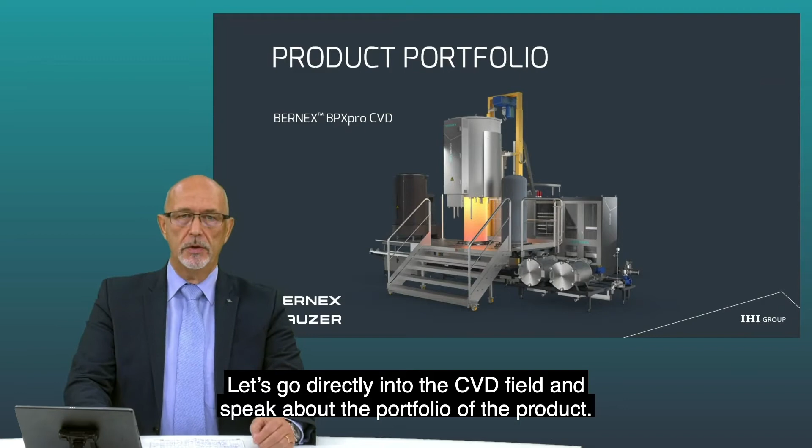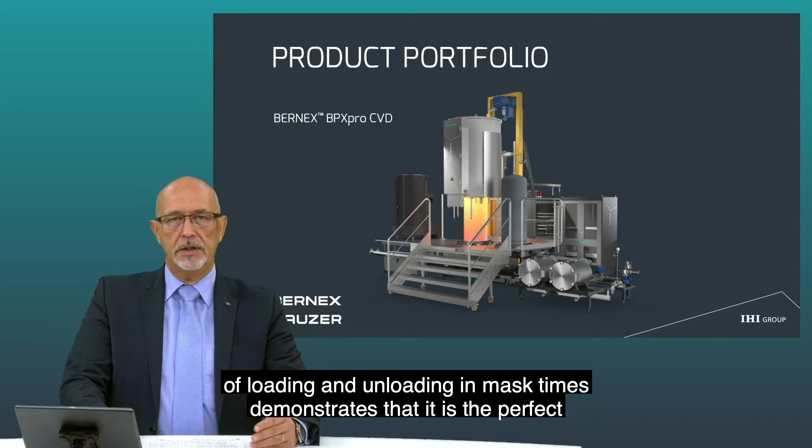So let's go directly into the CVD field, speaking about the portfolio of products. Of course, we have made CVD machines since 1973, fully dedicated in construction and design to cutting tools. The size of the reactors, the work trays, all the construction is really dedicated to cutting inserts. The fact that we have a dual chamber allows for preparation, loading, and unloading in mask times, demonstrating that it is the perfect tool dedicated for these applications.

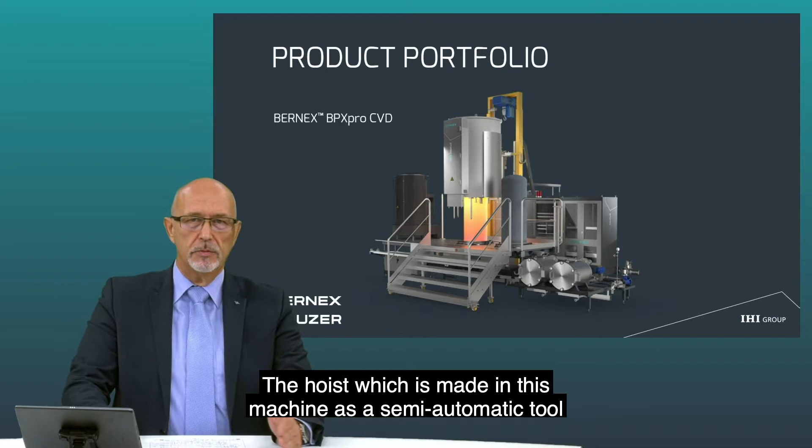The hoist makes this machine a semi-automatic tool, delivered with neutralization, which gives the machine the possibility to be totally free of environmental concerns. The important point is that we dedicate these machines to a multiple variety of coatings: TIN, TIC, TICN, MT-TICN, which by the way is a technology developed in the 80s and 90s by Bernex, as well as aluminum oxide with different crystallographic structures - alpha, kappa, and texture today.

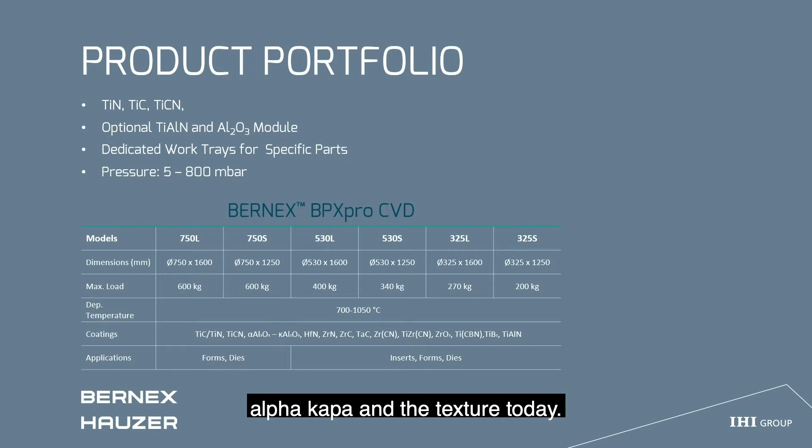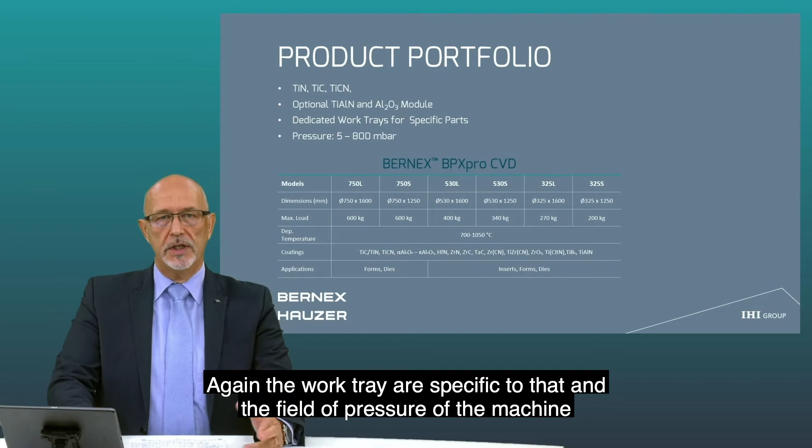And one of the latest is TiAlN coatings by CVD. Again, the work trays are specific to that, and the field of pressure of the machine moves from 5 to 800 millibars.

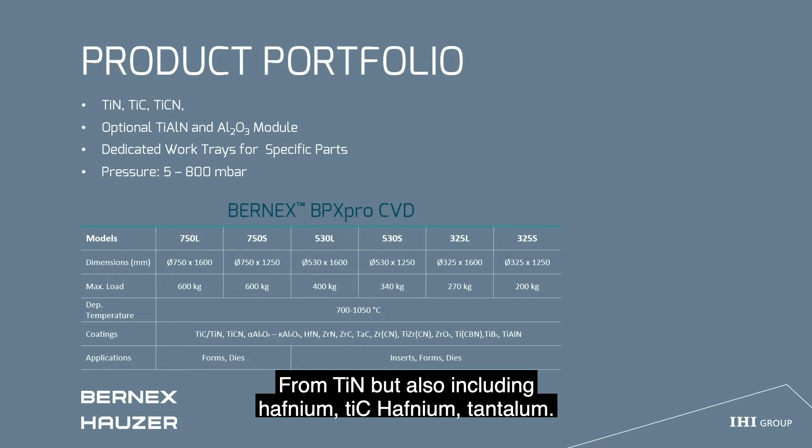This machine effectively allows us to have a nice spectrum of coatings, from TIN but also including hafnium, zirconium, tantalum, versatile elements in the modules of the machine, with hardware and software integration.

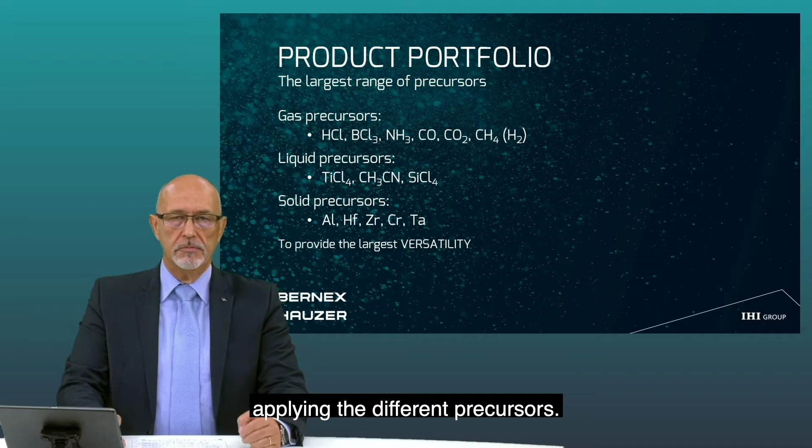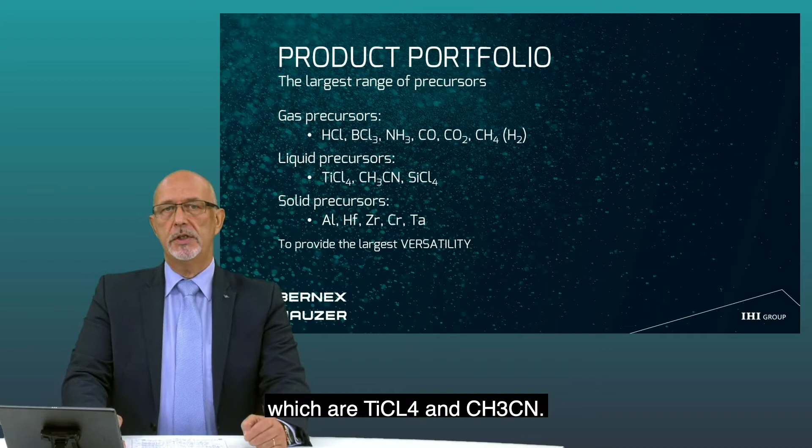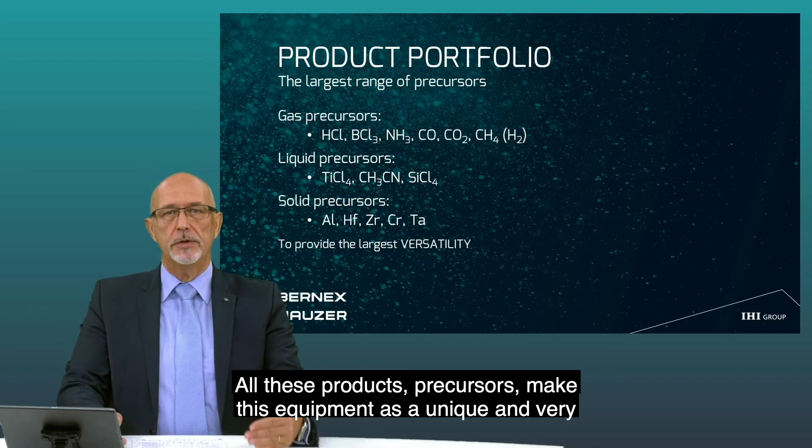To integrate these modules, we are applying different precursors: gases like HCl, BCl3, ammonia, CO, CO2, CH4, mixed with liquid precursors which are TiCl4 and CH3CN for the MT-CVD for instance, as well as SiCl4 to bring the additive silicon element into multilayer coatings. Of course, also solid precursors with aluminum, hafnium, zirconium, chromium, tantalum. So all these precursors make this equipment a unique and very versatile tool to apply different solutions for our customers.

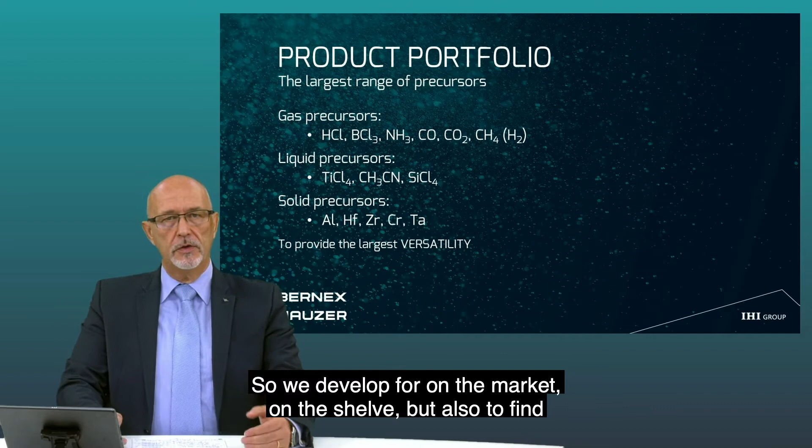We developed solutions on the shelf for the market, but also to find solutions to bring coating facility to our customers. We are really, as I would say - taking a word from Louis - enablers, making this portfolio of applications dedicated to our customers. So I will give you three examples of applications, and the first one here is an application for customers.

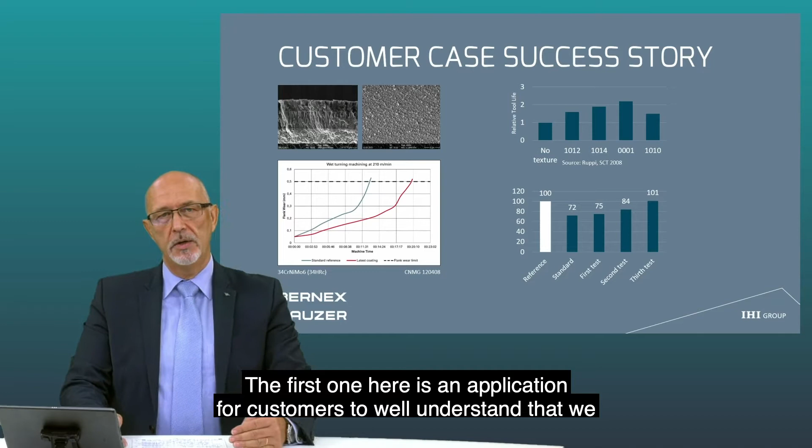So to understand that well, we build machines with upgrades, but we also support our customers over time, live, and in the development of applications. We had a customer who came back to us, having bought equipment from us a couple of years ago.

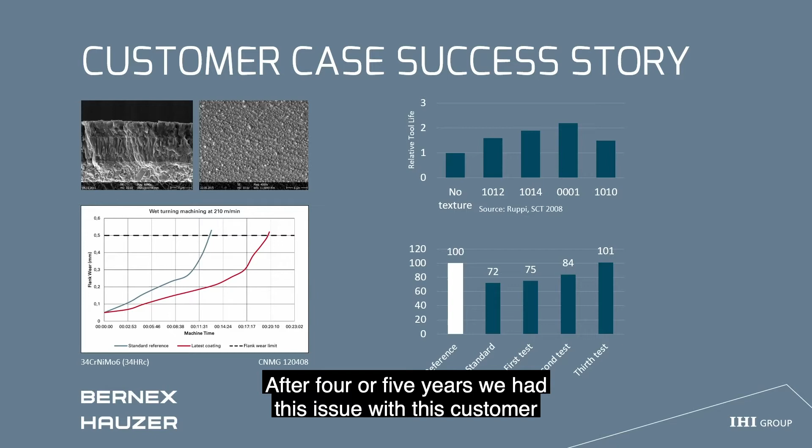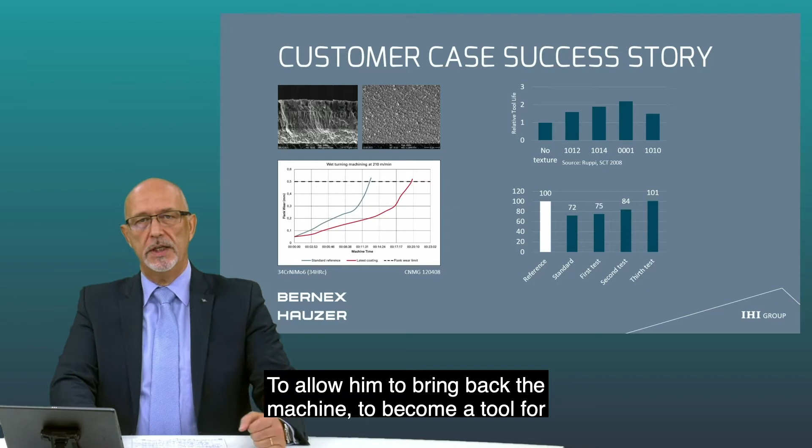We were dedicating some standard coatings, CVD coatings. After 4 or 5 years, we had an issue with this customer being far from the benchmarks. To allow him to bring the machine back to being a tool he could use for his actual needs, we participated with him in development campaigns with different test campaigns to increase the performance of the coating.

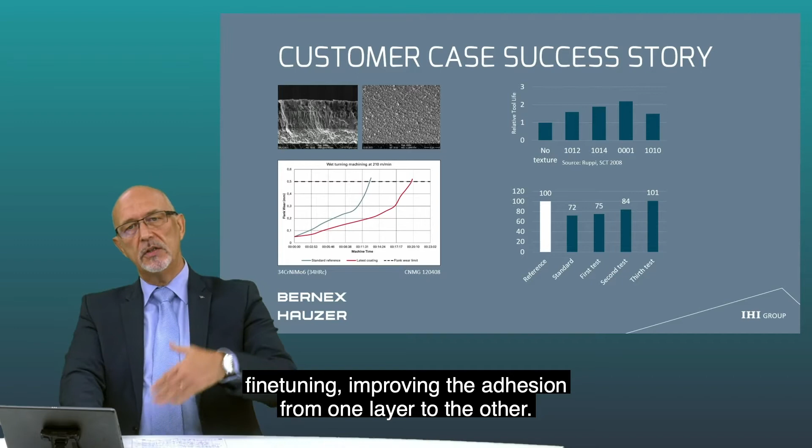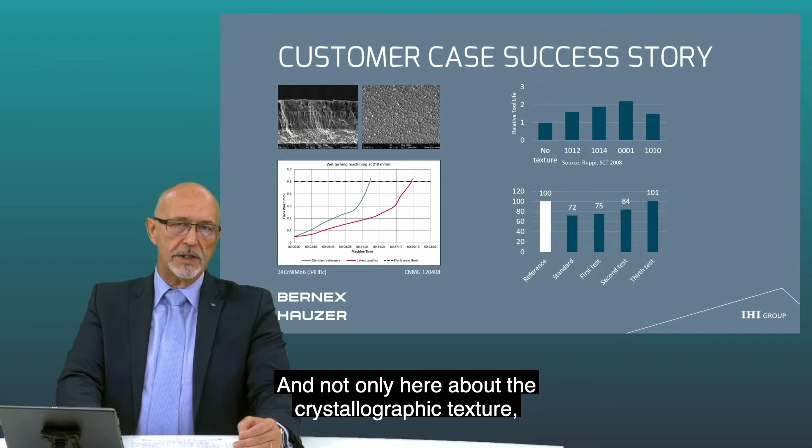So we did it by making new different multi-coating layers, improving the fine-tuning, improving the adhesion from one layer to the others, going from TiN, MTTiCN, aluminum oxide, and not only about the crystallographic texture but also the texture itself.

And so we managed to bring performance back from 70-75% to 84% of the actual benchmarks.

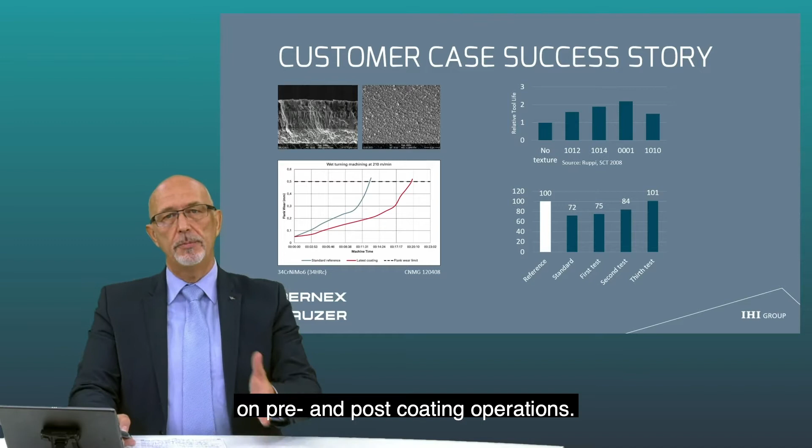The last improvement we also made thanks to working on what we call the pre and post coating operations, which helps to definitely bring the application back to the level of the benchmark.

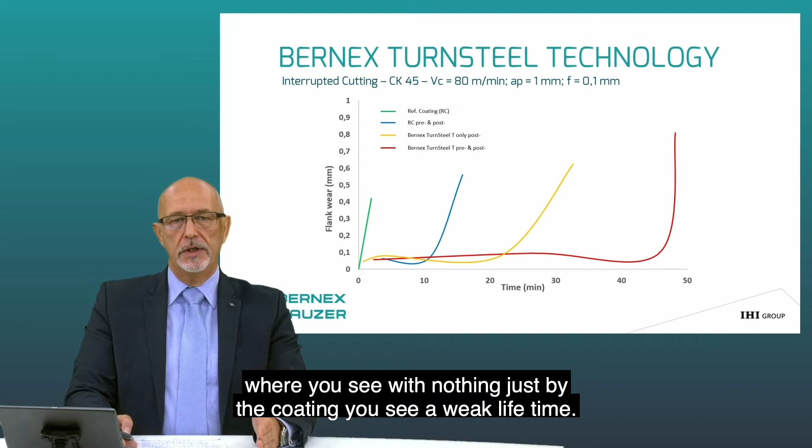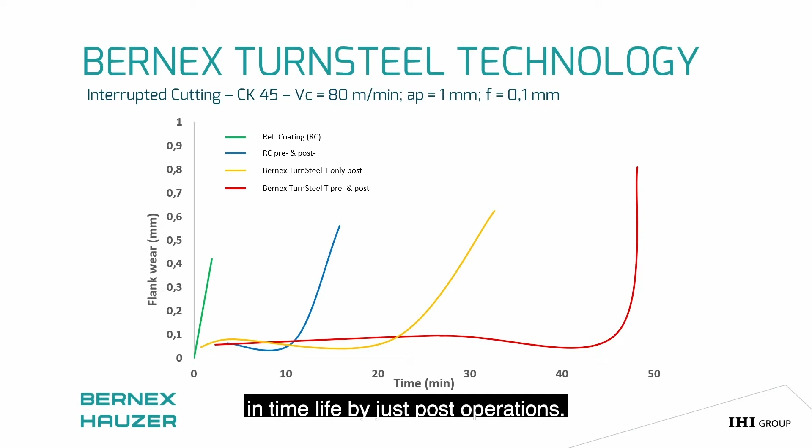To illustrate this pre and post coating effect, this graph explains it well. With standard coatings, with nothing, just the coating, you have a weak tool life, which you can increase by 10 minutes in tool life just with post operations.

By choosing the right dedicated coating, multi-layer aluminum oxide and texture, you can then jump to this stage, which is 30 minutes, a huge improvement in tool life.

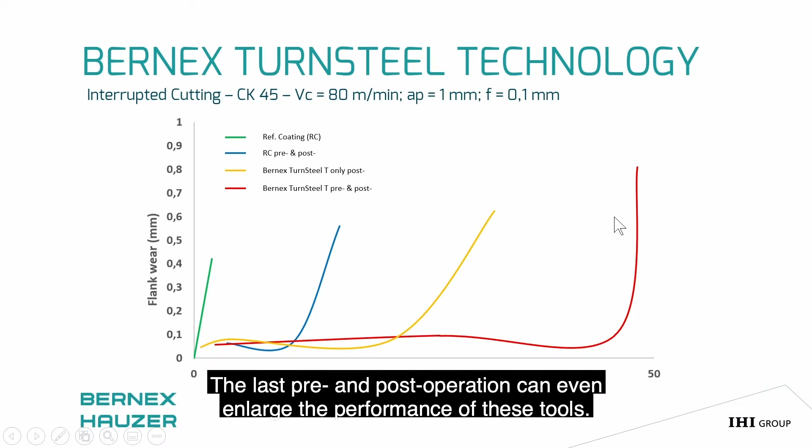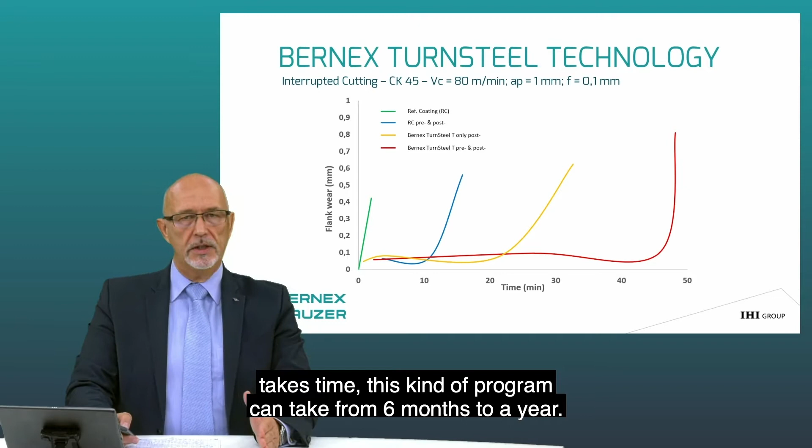And the pre and post operations can enlarge the performance of these tools even more. This is done in combination with our customers. These are things that take time - this kind of program can take from 6 months to a year.

It also allows us to upgrade our equipment, which we are fully able to do. One good illustration of this is the latest TiAlN coatings.

This was worked out by a German institute with OEMs, and they came back to us saying, okay, we found something nice, but this something nice with the TiAlN coatings needs to work with some new materials, new precursors, and working with a pressure field which is not usual.

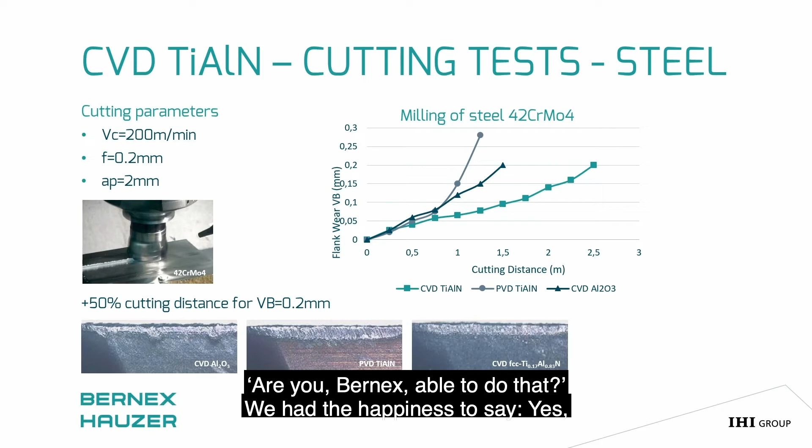Are you, Bernex, able to do that? So we had the happiness to say, yes, we know this precursor, we know how to handle these pressures, and that allowed us to propose an upgradable hardware with software technology to those customers developing these technologies.

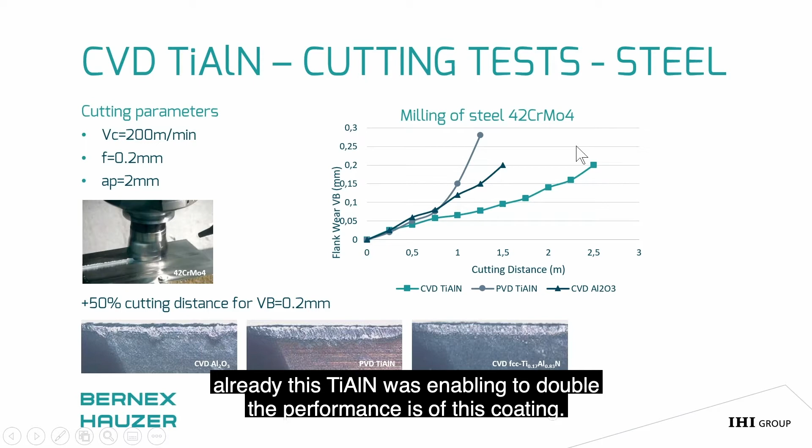Here is an illustration of one of these early coatings we did for one of our customers, where each uses his best PVD and CVD reference, and you see that this TiAlN already enabled doubling the performance of the coating. So this is really the aim of our organization.

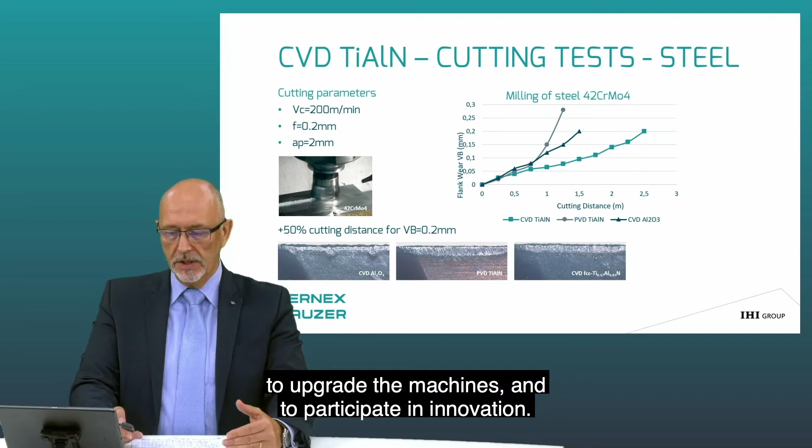It's to continue working on the development of tools, to upgrade machines, and to participate in innovations. So now, what's coming next? Because it's always a step to think about.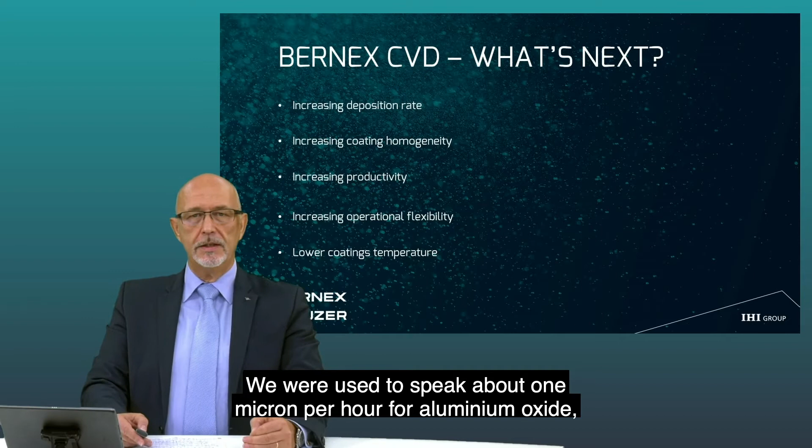Increasing the deposition rate - that's what we learned with this TiAlN. We learned that with different precursors, we are able to increase the deposition rate. We used to speak about 1 micron per hour for aluminum oxide, and with this TiAlN, we get to 2, 3, sometimes 4 microns per hour.

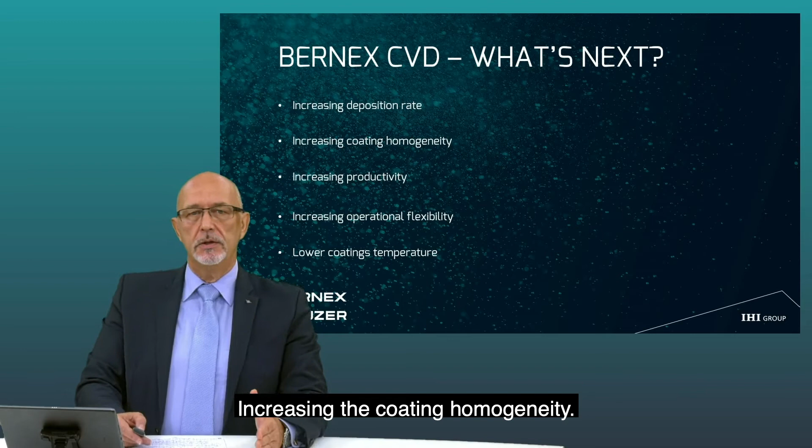Increasing the coating homogeneity - 20 years ago, when I joined this company, we were speaking about homogeneity or distribution of plus minus 20%. 10 years ago, with changes to our hardware and software, we were able to go down to plus minus 10%. And today we still think there is room to improve that further.

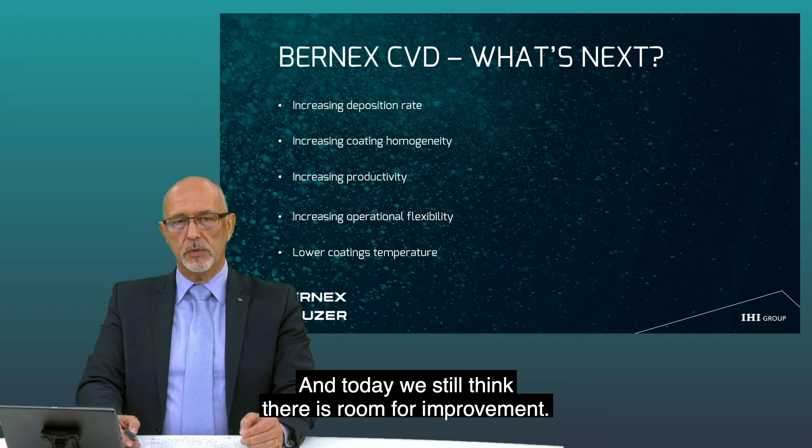So these two elements participate in improving and increasing productivity, but not only. There is some hardware development we are hard at work on, which can also participate in developing that, such as increasing operational flexibility through automation of the layout and the design, which also contributes to the evolution of our equipment.

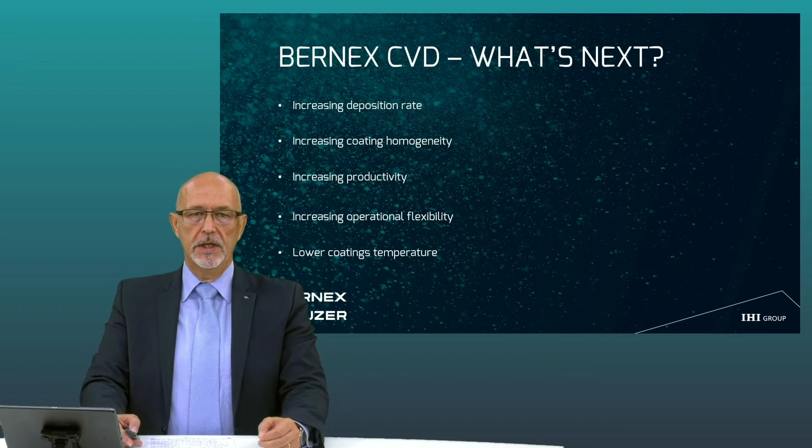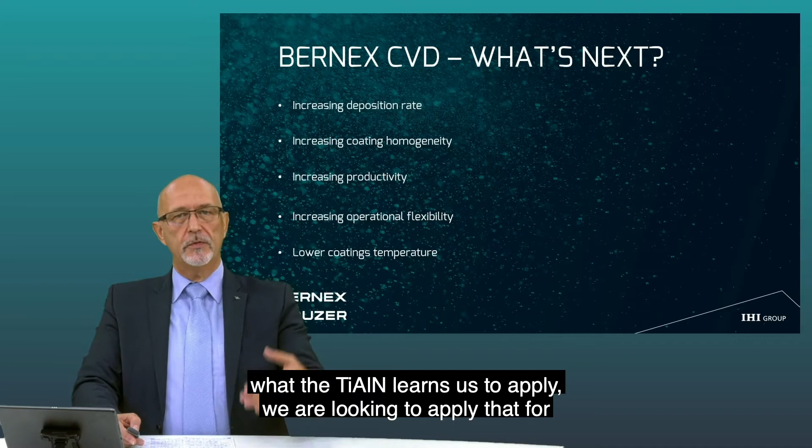And just to close the loop, lowering the coating temperature, because that's what the TiAlN teaches us to apply. We are looking to apply that for all the standard coatings.

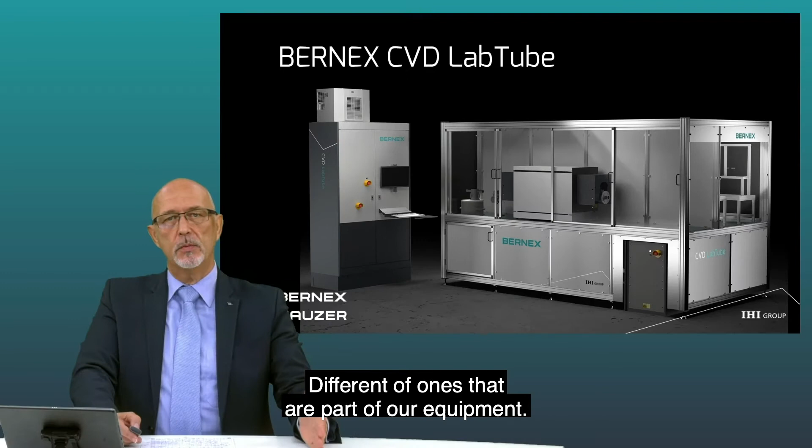One of the last things I wanted to present is here - another machine, our LabTube, which is totally an R&D machine dedicated to allowing the R&D department of all our customers to work with a broader portfolio of applications, natures, and substrates, different from what exists on our equipment. And I think that's what I wanted to briefly introduce you to this morning.

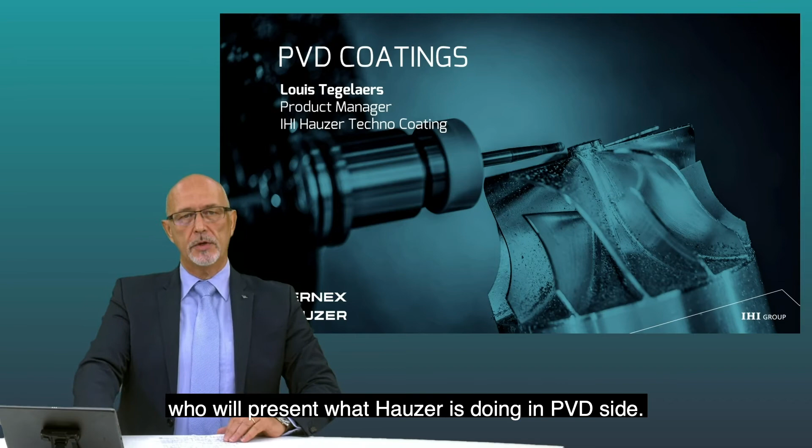I'm a product manager for a couple of years now at Hauzer Techno Coating, and I will tell something about PVD technology, where PVD stands for physical vapor deposition. Philippe talked earlier about CVD, which stands for chemical vapor deposition.

So I want to re-summarize a little bit what I'm going to speak about. We have some PVD solutions, some coating technologies. I want to discuss some results and test cases with customers, and I want to show you the product portfolio we have.

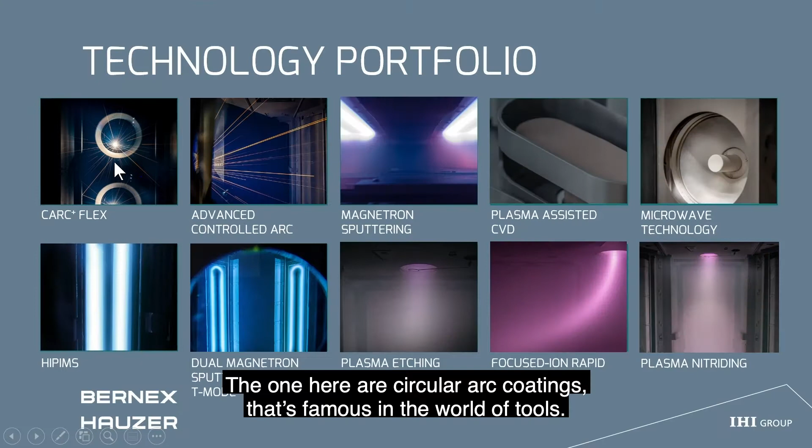One is circular arc coatings, which is famous in the world of tools. We developed our own circular arc called Flex, so we have higher output and higher currents on the surface, and therefore by splitting the beams we can still have a smooth surface.

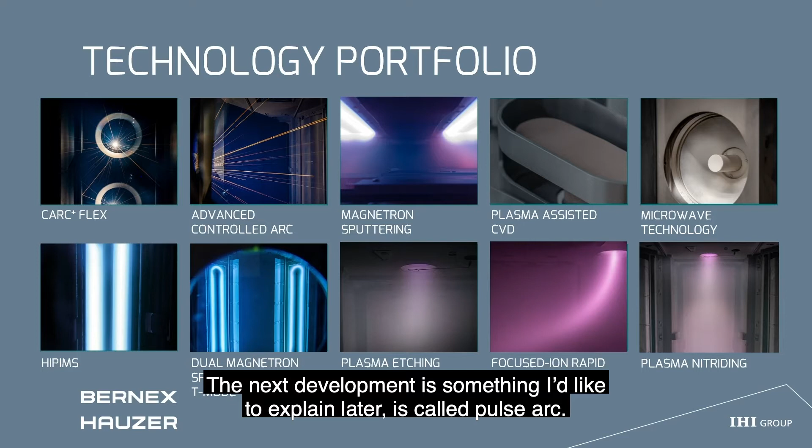The next development, which I'll explain later on as well, is called pulsed arc, and this pulsing decreases the roughness even more.

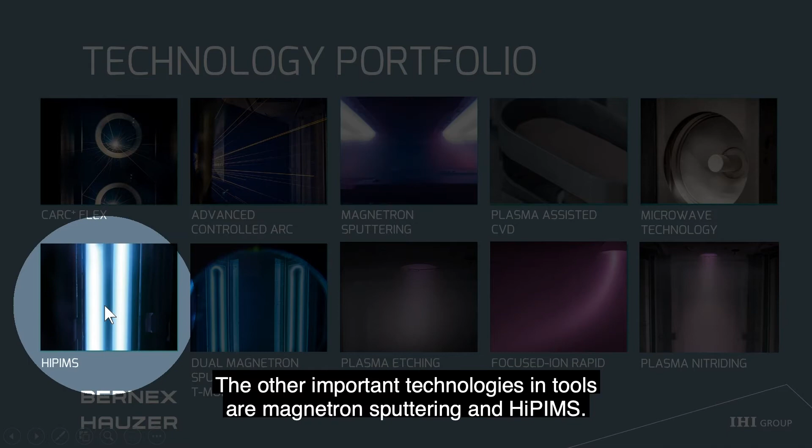The other important things in tools are magnetron sputtering and, for instance, HiPIMS. HiPIMS is also a magnetron sputter technology, but it's a new generation. Together with dual magnetron sputtering, this can combine nitride coatings and oxide coatings. That's for the cutting tools.

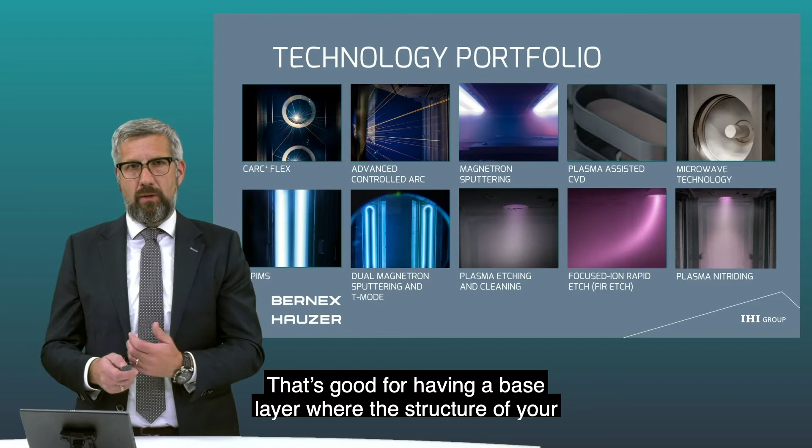For forming tools, we still have plasma nitriding, which you see here on the right hand. That's good for having a base layer where the structure of your coating is much better.

Furthermore, some other cleaning technologies are also important. If the product is not really clean, then the coating doesn't stick, and at the end of the day you will have a malfunctioning of your coating.

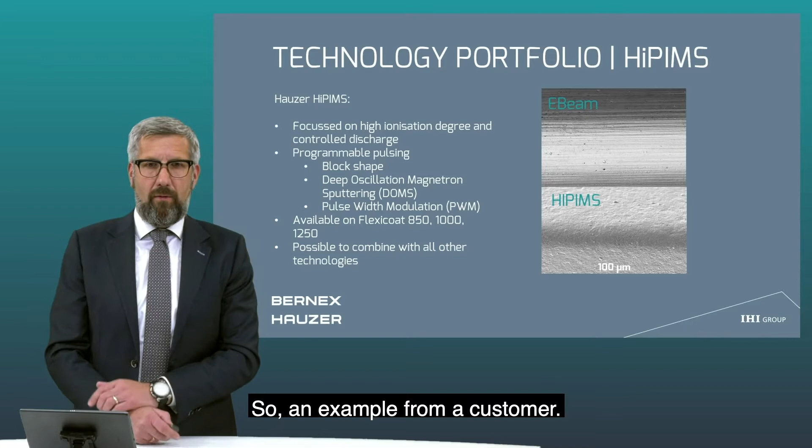So for an example from a customer: for the time being, E-beam technology was widely used for the tapping industry and is still used, very much used. It's a very good coating and mainly produces titanium nitride and titanium carbonitride.

In the next slide, I will show you that HiPIMS coatings can have some other benefits over these E-beam coatings. What is HiPIMS? HiPIMS stands for high power impulse magnetron sputtering.

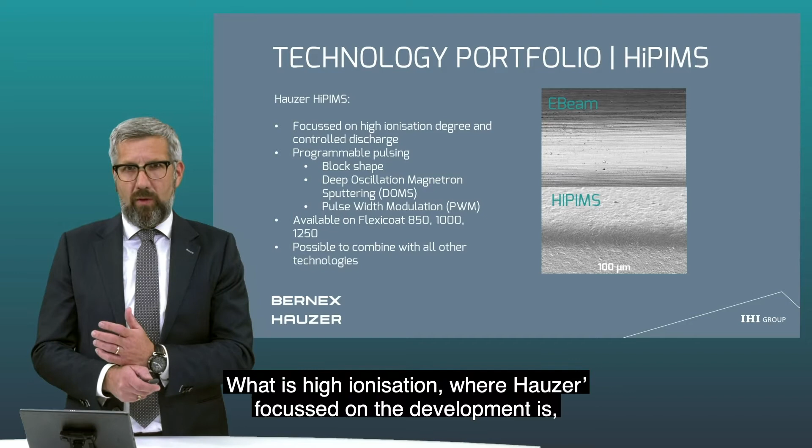What is high ionization? Where Hauzer focused development is we want to have a high ionization degree and a controlled discharge, meaning that the sputter rate still keeps high.

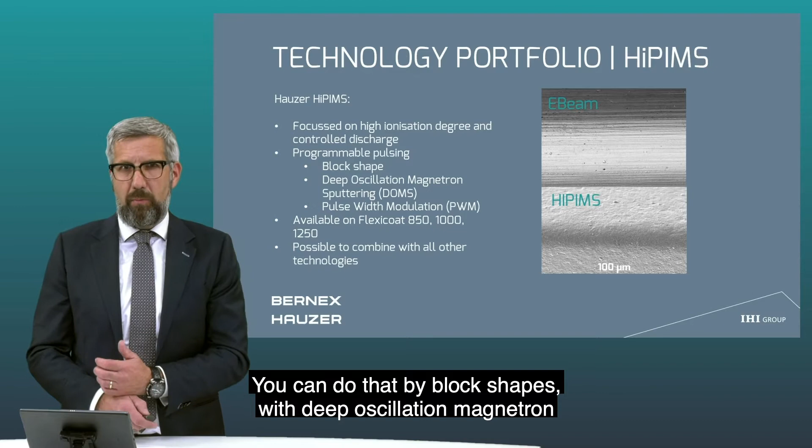You do this by programmable pulsing, and that you can do with block shapes, with deep oscillation magnetron sputtering, called DOMS as well, but also with pulse width modulation. Pulse width modulation needs a little bit more explanation.

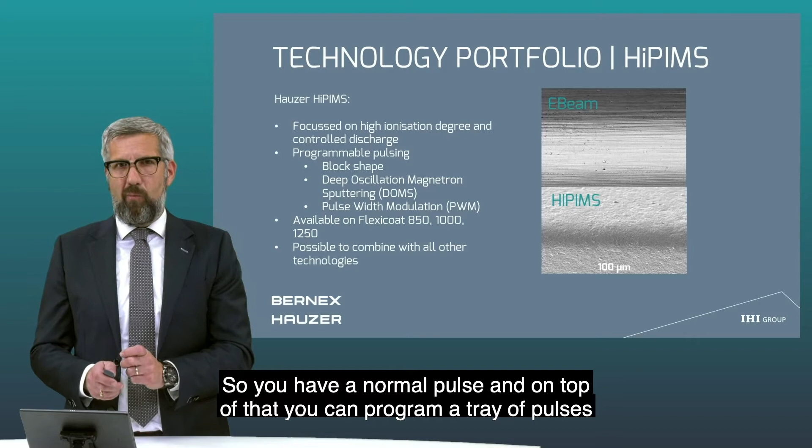So you have your normal pulse, and on top of that you can program a train of pulses, and by doing that you can adjust all the parameters of a coating. You can influence the internal tension, you can influence the build-up of the coating itself, and therefore have some new, renewable, programmable things put into a coating.

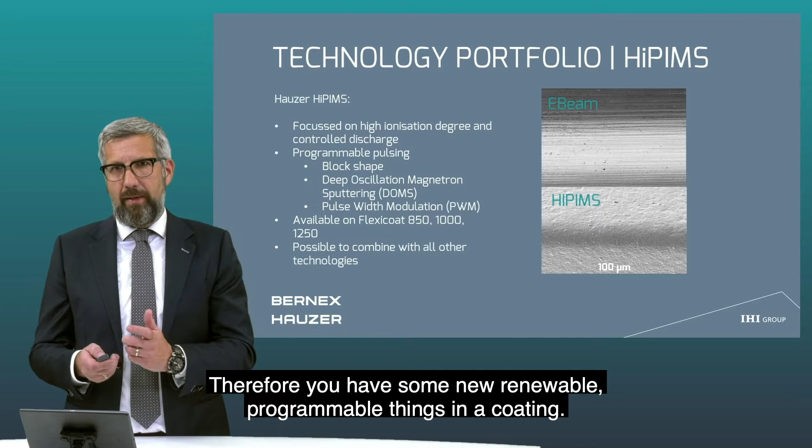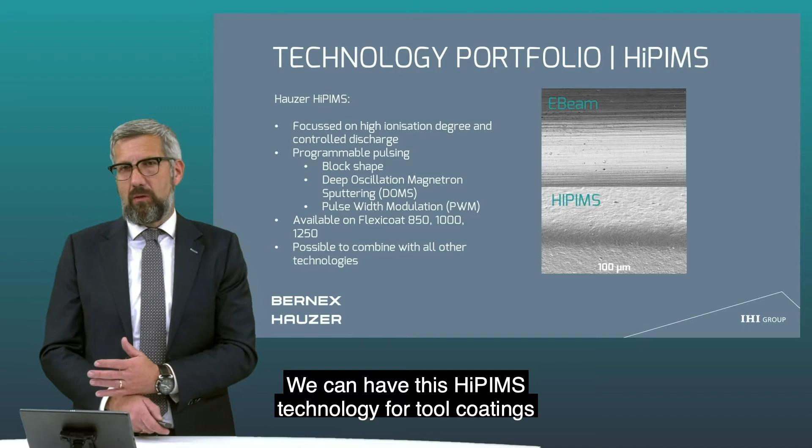There are so many parameters at the moment that even for us it's undoable to have all these parameters available. We can have this HiPIMS technology for tool coatings on a FlexiCoat 850, a 1000 system, and a 1250 system, as I will explain a little bit later.

Most of all, the advantage is that we can combine this technology with other technologies. So you can combine ARC with HiPIMS, dual magnetron sputtering with HiPIMS, whatever you want. We can discuss and think about what the ideal solution would be for your tools.

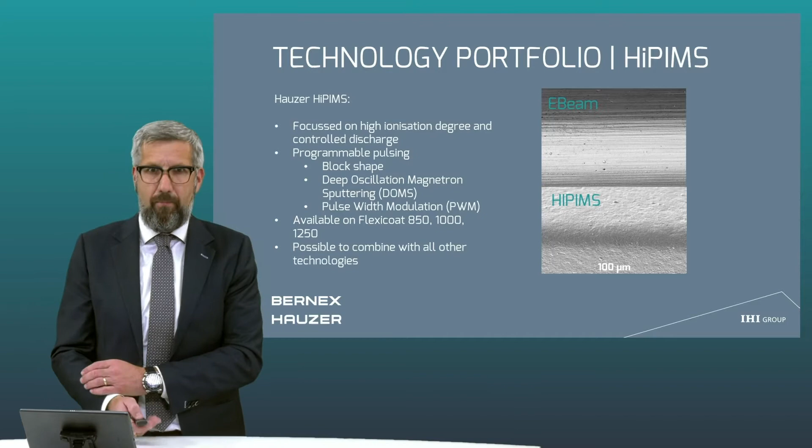So some examples, in this case for a tap. Tapping - as already said, titanium nitride E-beam, that's the standard for a couple of years already, I think even more than a couple of years. You have this tapping material, and you have the tool or the material it's working in.

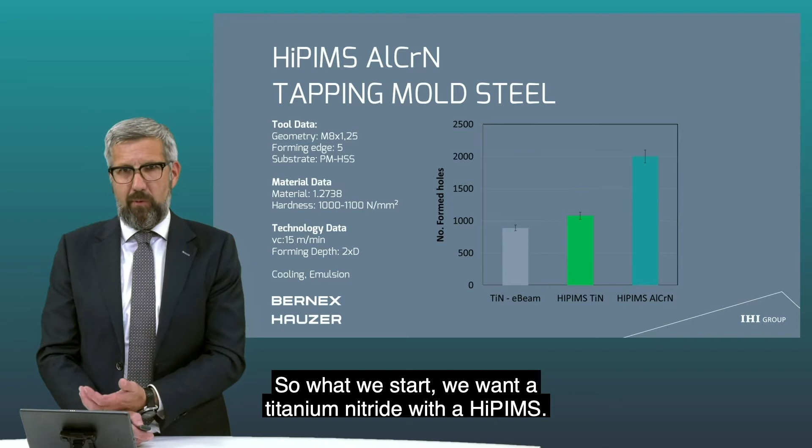So people are starting to say, hey, this E-beam technology is old-fashioned and we want to start over with new technology. So what we start with is, okay, we want to do a titanium nitride with HiPIMS. Titanium nitride works - HiPIMS is a new technology, but titanium nitride is one of the first coatings and therefore maybe already a little bit old-fashioned, but okay, it works.

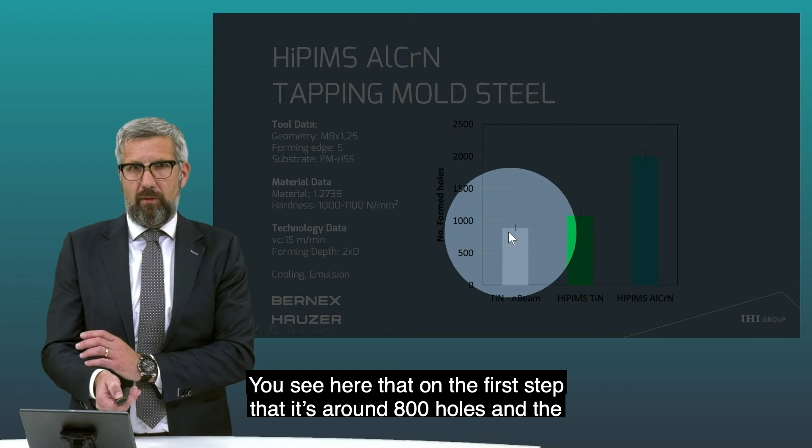You see here that in the first step you have about 800 holes, and in the second step with the HiPIMS titanium nitride you get to 1100 holes.

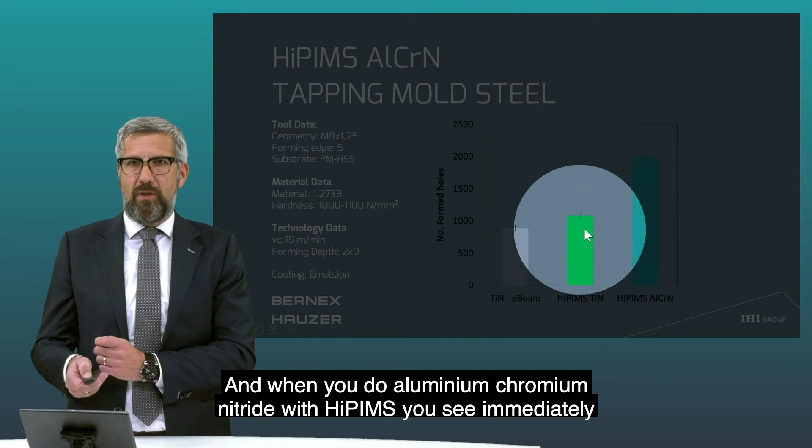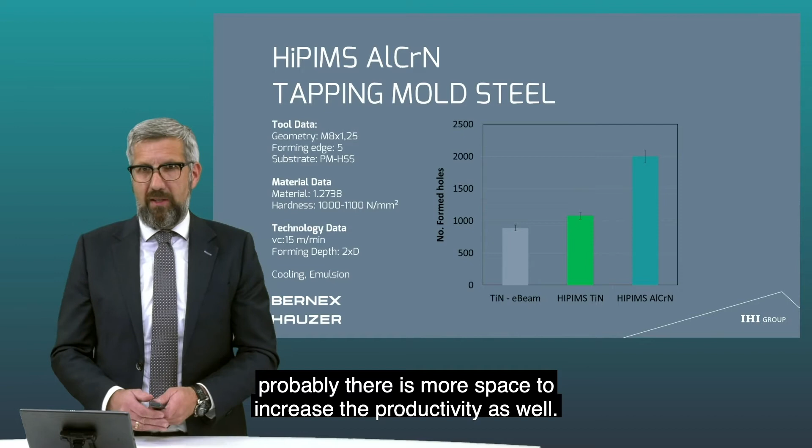But we thought, okay, if you can do this with titanium nitride, why shouldn't we take another material, for instance aluminum chromium nitride? And if you do aluminum chromium nitride with HiPIMS, you see immediately a big jump to 2000 holes. And that's only on a material which is not post- or pre-treated, so probably there is more space to increase the productivity as well.

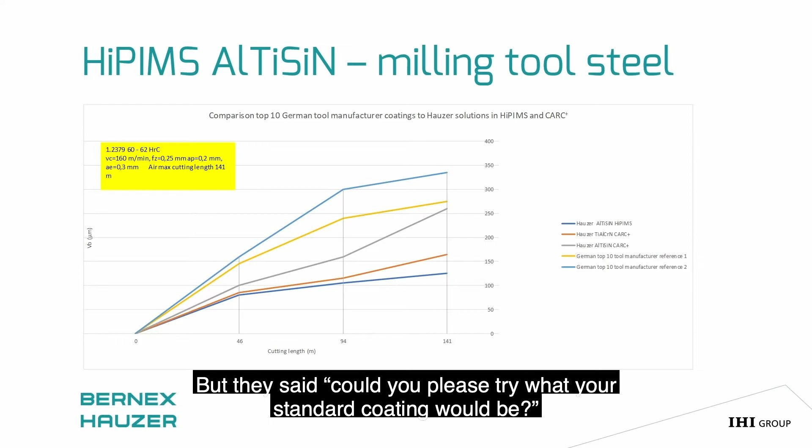So another tool which is compared, and then we compare from a well-known German manufacturer of tooling. The top two lines are the reference from this tool manufacturer itself. He does his own coatings on, let's say, equipment from the competition. They are not bad at all, but they said, okay, could you please try what your standard coatings will be?

So the first shot, and you see this is the CARC+ line in the middle. That's already better than what they have in-house. But the HiPIMS is even better. So what you see, two different coatings, is already better than what they have in-house at the moment.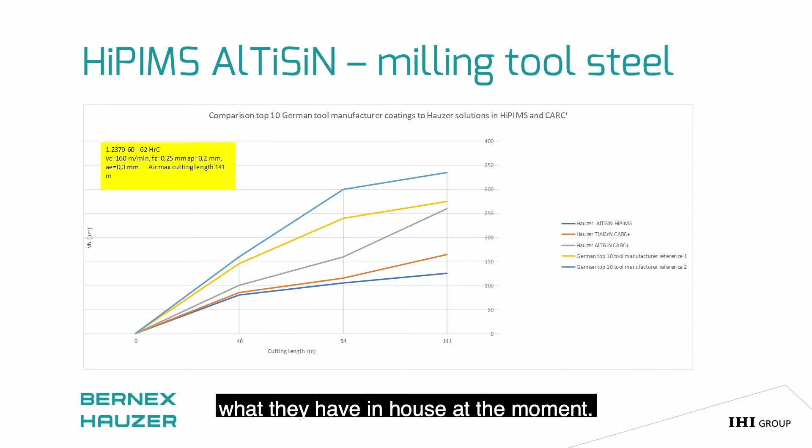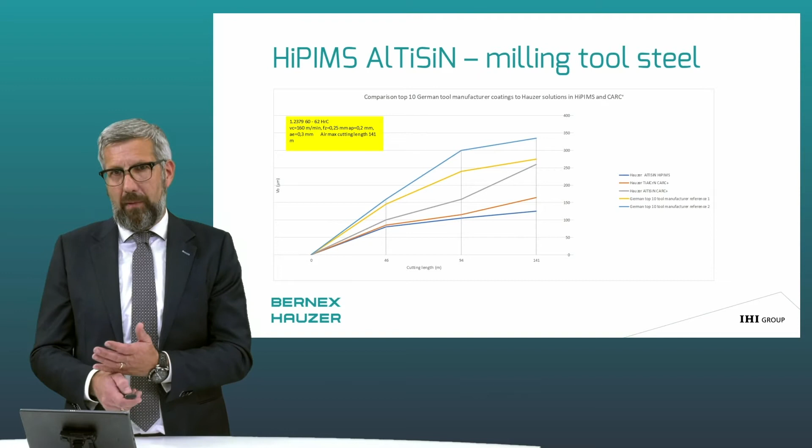This is not something which is always realistic. This is a one-shot luck. Normally we develop, as Philippe also told us, it takes a couple of months to develop together with the customer, put on a coating, do a wear test, see how the wear is going after machining, and from that point renew the coating design and do a new test.

So the second one, where I already talked about a little bit, is pulsed arc. This is the latest member of the technology portfolio. With pulsed arc, we try to lower the droplet density and roughness compared to the CARC+ we already have. We do that with highly ionized metal plasmas, and that means the deposition of the coating has good adhesion and high density.

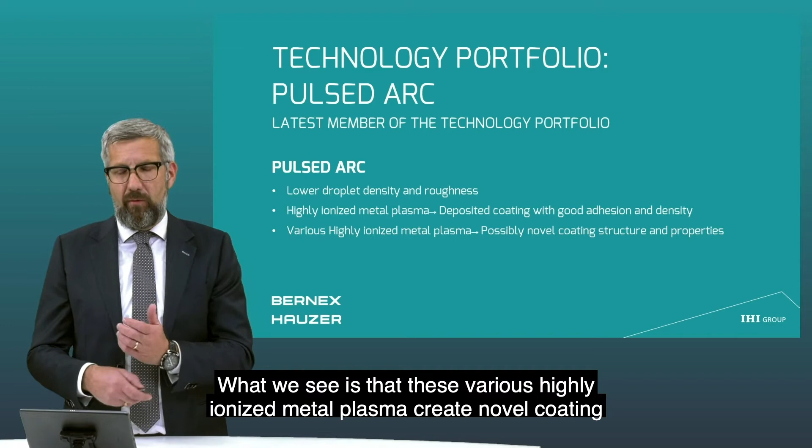What we see is that these highly ionized metal plasmas create novel coating properties, novel structures, and new possibilities to make coating designs.

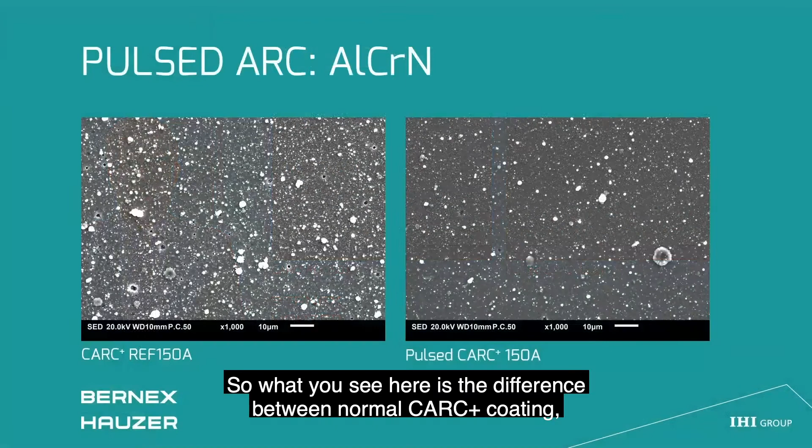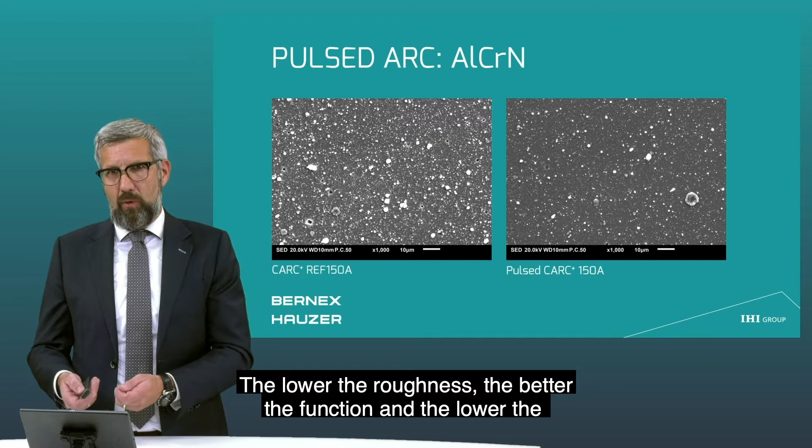So what you see here is the difference between normal CARC+ coating - you see the droplets over here - and this is the one with the arc but pulsed, and you see much less droplets. This is better for when it works on a metal sheet. The lower the roughness, the better it functions, and the lower the roughness as a starting point, the less energy you have to put into post-treatment of this coating.

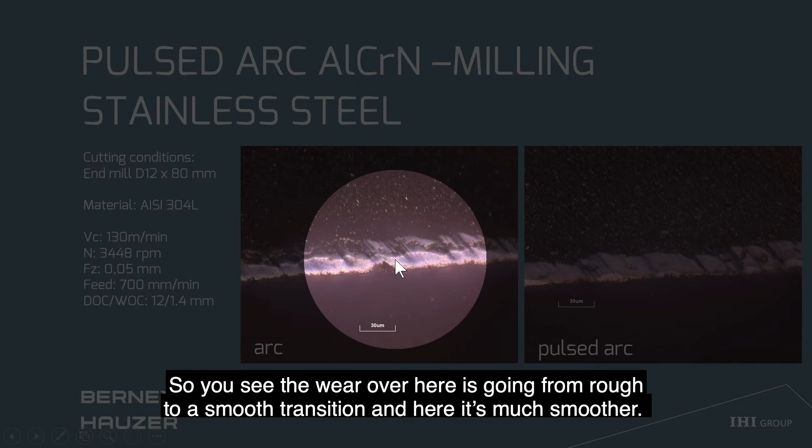So what you see here, and excuse me, but we don't really understand how things work at the moment - it's so new. But what you see here is a difference in wear mechanism between the arc and the pulsed arc. The wear over here is going from a rough to a slightly smooth transition, and here it is much smoother and starts in a different way.

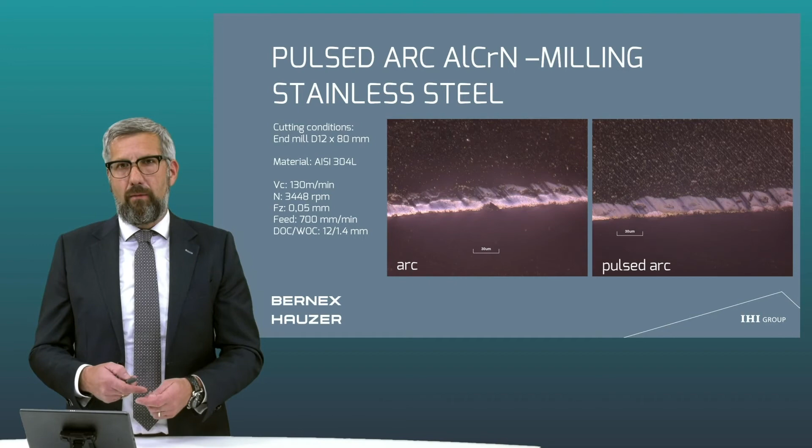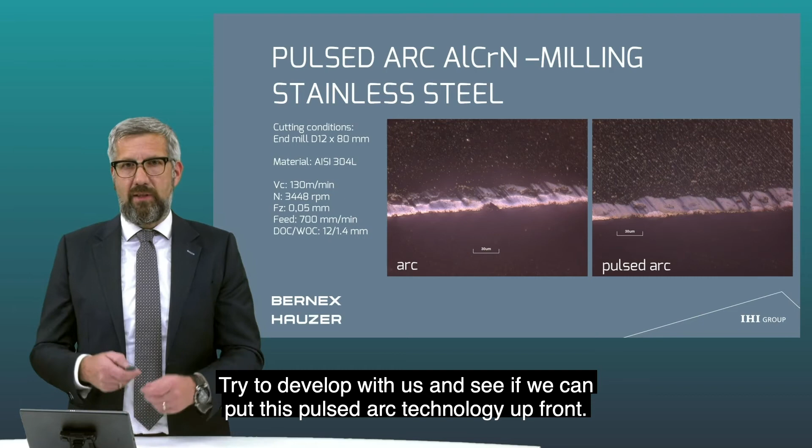Do we understand it yet? No, not yet, but we are trying to understand it and developing together with customers more and more how this works. In this case it worked fine, but we want to ask everyone out there, please try us, and please do not expect that the lucky shot will work at once. Try to develop with us and see if we can put this pulsed arc technology up front.

So then we come to the product portfolio. Of course coatings are important, but the equipment where the coatings come from is also important. This equipment should be reliable, should be productive, should be easy to maintain, and all kinds of things.

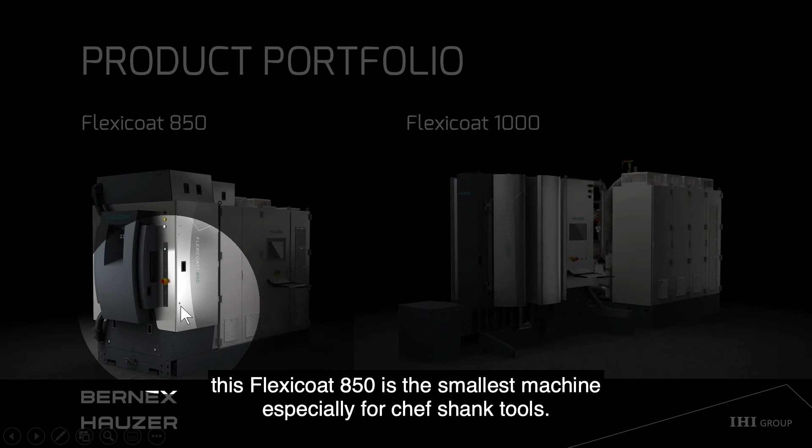What you see here is a Flexicoat 850. This Flexicoat 850 is the smallest machine, especially for chef shank tools. This machine has 4 flanges, so we can put in 4 different technologies if we want. It has a table diameter of 500 millimeters, a table height of 500 millimeters as well. That is the homogeneous zone of the coating.

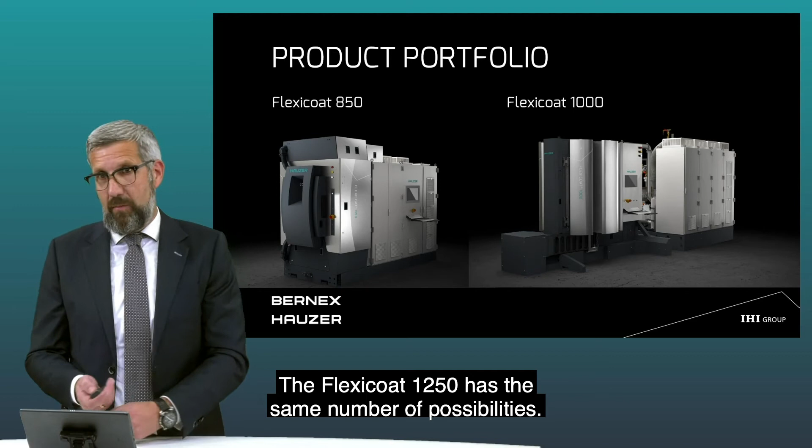The 1000 has 6 flanges, meaning you can add 6 technologies inside. And the 1250 has the same number of possibilities. So you have 2 doors - you don't see them open here, but you can open the doors widely so you can touch everything inside the machine very easily.

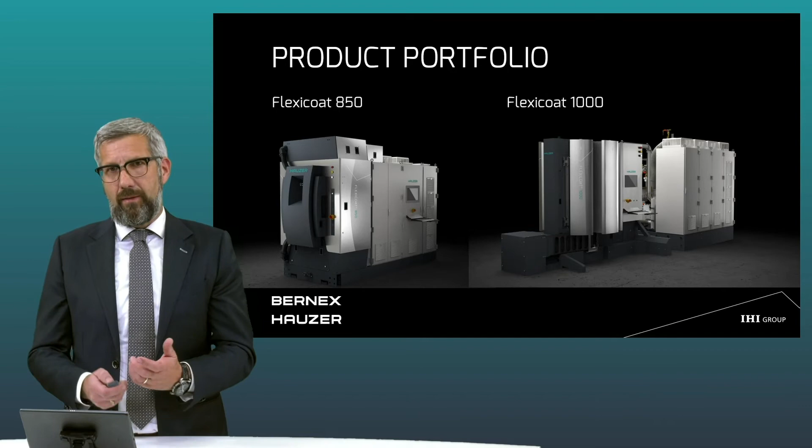The weight here is about 1,000 kilograms, the height of the coating zone 650, and the diameter of the table also 650. And then we have a large workhorse, the 1250. The principle of the design is the same as the 1000, also 6, even 7 flanges, 810 millimeters diameter and 815 millimeters of coating zone.

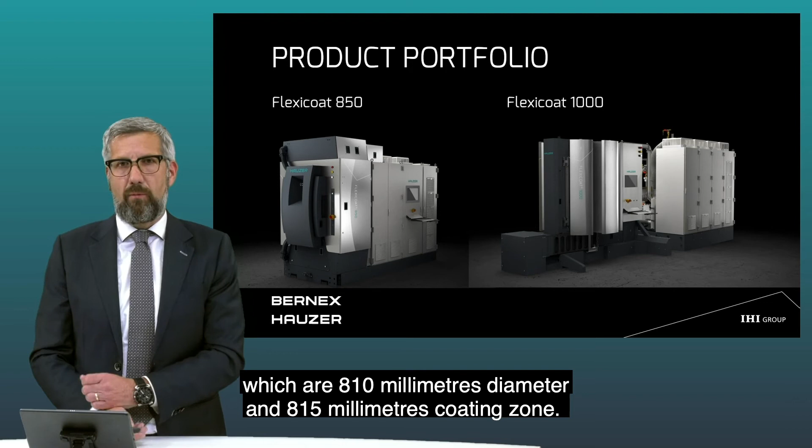So I have an interesting question here. Can I explain more about low pressure advantages? The lower you're going in the pressure, the less gas you're introducing and the faster it goes. You can actually tune different materials, and low pressure can also contribute to different textures or adhesion on the coating.

We learned a lot with TiAlN, which was the first one. We are making some work with low pressure on other elements like aluminum oxide and things like that, and it brings some inputs. There aren't any developments that I know of, but I'm sure the big OEMs are working on that, and we are always pleased to work on developments with our customers on it. So I hope I could contribute an explanation or answer to that question.

We have another question, from Takanori Sugiyama for Philip: is it easy to make product development by CVD lab tube with normal BPX? That's the right question. The lab tube is another approach.

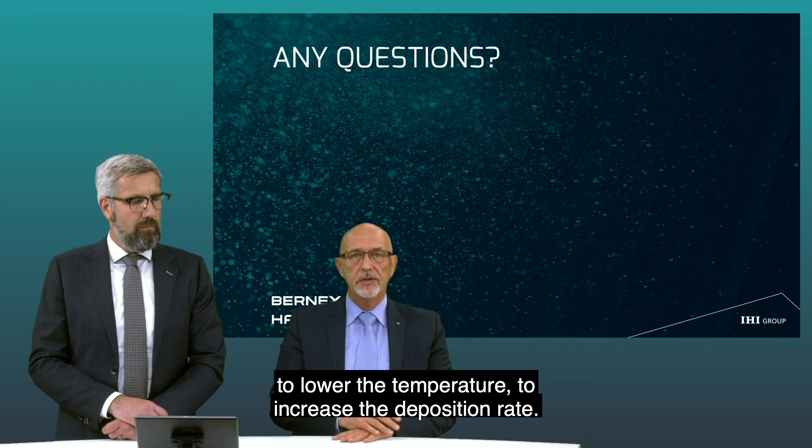These CVD developments allowed us to lower the pressure, lower the temperature, and increase the deposition rate. So we learned a lot. It totally opened the door for us in research and development, and the low pressure means you're probably making denser coatings, which can explain their better performance than higher pressure coatings in the market. That's why today we try to transfer all these standard coatings to this low pressure environment as well.

Then I see a question from Brazil. Hello, Fernando. He says: hello Louis, what is the best solution in your experience for TCT circular saw and HSS circular saws? We know a lot about PVD, but is there a chance for CVD coatings? So in fact, the question is more for Philip, but to my opinion, Philip can support me in this one.

The flatness of a circular saw is very important. With CVD, you go to a much higher temperature than with PVD, so are you able to get the circular saws flat with these elevated temperatures? Frankly, I don't believe it, but maybe you can make a statement, Philip. It will be very challenging. At the end of the day, I don't know an application for saws with CVD so far that I can remember. But if you could imagine one, the post-operation, redoing the heat treatments, will just make the thing that much more expensive. The right answer here is for sure PVD.